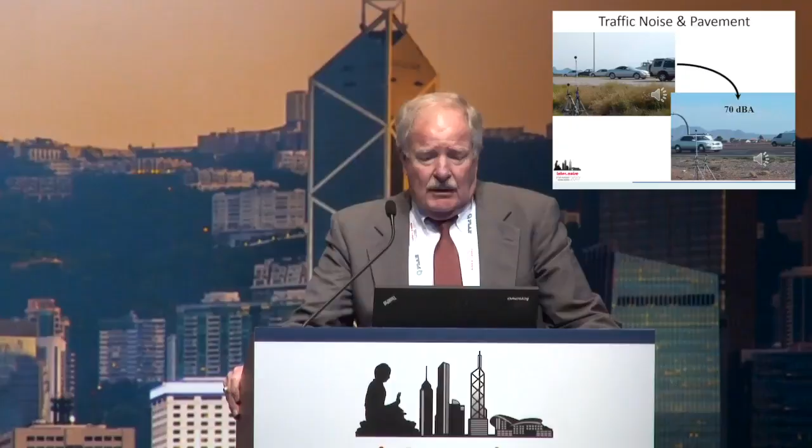Okay, a way to illustrate that is my first audio example here. The question is, which of these would you like to live next to?

You can tell the second one is quite a bit quieter than the first. It doesn't show up here on this slide, but it's about a 9 dB reduction. For those of you that don't deal with dB too much, 3 dB is usually called noticeable, and 5 dB is typically what's used for noise abatement criteria for being a significant reduction.

You might ask, why haven't regulations worked? Automobiles have been regulated for some time. Unfortunately, the test procedure is really geared at powertrain noise. The test itself is low speed under full throttle acceleration, so it tends to be dominated by engine noise. Also, the test surface used is a relatively quiet pavement, so it tends not to emphasize tire noise.

There are new procedures being developed, though, or starting to be in practice now, that will address tire noise more, and also there's efforts at tire noise labeling and that sort of thing. So eventually all these things will help, but the biggest problem is that there is a wide range of level that's produced by different pavements.

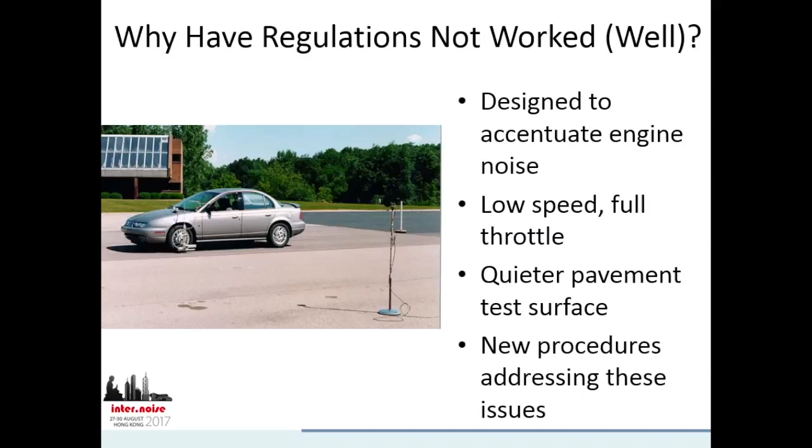This kind of illustrates the pass-by noise contributors. This is data taken by the Federal Highway Administration in the US. The green line shows non-accelerating or cruising vehicles, averaged over many roads—these are thousands of vehicle pass-bys. The blue line shows vehicles under acceleration. Now, the pass-by procedures that regulate vehicle noise tend to deal in the area of around 50 kilometers per hour, so it's kind of bringing the blue line closer to the green line as tire noise or engine noise becomes lower with these regulations.

The brown line is basically a typical fit for tire noise, which in this case is about 40 log of the velocity. So what you can see when you compare the green and brown lines is that under cruise conditions, it doesn't take very long until the pass-by noise level is dominated by tires as opposed to engine noise.

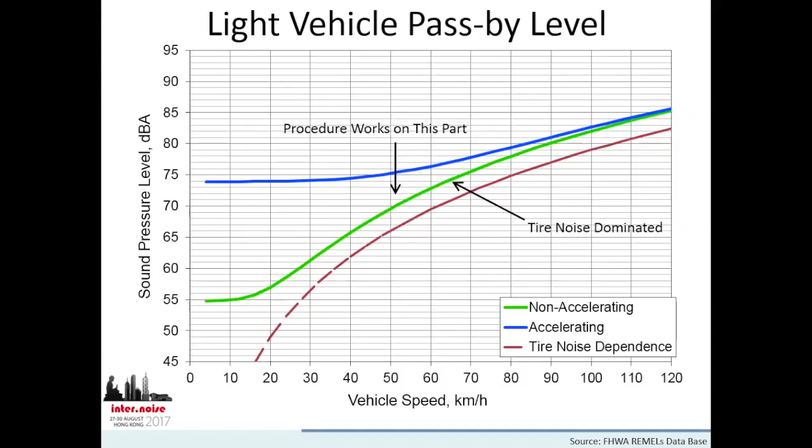The same thing is true for trucks. This is an example of some beamforming we did recently, geared towards looking at noise sources on heavy-duty trucks. This is an A-weighted contour, so yellow is the higher levels. What you find in terms of this A-weighted level contour is that, in this case, the drive axle tires are one of the dominant sources, with possibly some engine noise to the front of the truck.

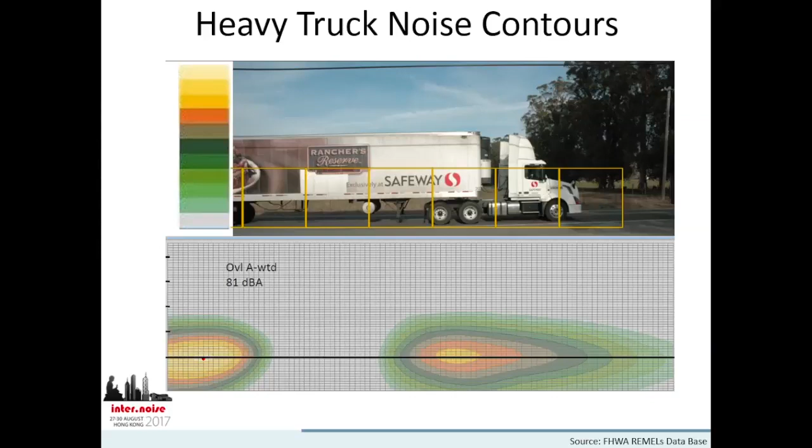And also, interestingly enough, the trailer tires at the back are equally loud to those in the front. So this just emphasizes how much of a role tire noise plays in truck noise also.

This is going to be an outline of what my presentation will be today. I want to go through the phases of quieter pavement implementation. This is semi-universal, I think, in listening to presentations and talking to people in other parts of the world, in terms of the steps you go through. The first step is really awareness, and for a lot of people that's already happened—they know there are quieter pavements and that it can affect traffic noise.

One of the big contributors to this awareness was the book I'm showing here by Ulf Sandberg and Jerzy Ejsmont. This book was published, I believe, in 2002, and I've seen it now in almost every Department of Transportation pavement engineer's library or on their desk someplace. So it very much had a big impact on the field, I think. And I should say there's almost everything you ever wanted to know about tire noise in this book, except maybe the answer to what causes tire noise.

And that's only because there are so many different mechanisms, and it's a very complicated topic. It varies with pavement, varies with tire design, on and on.

The next part of implementation is actually coming up with measurement methods. To start looking at using quieter pavements, you need to know how to measure it. So that's the first step.

The next step typically is surveys. Once you have a measurement method that's proven and standardized, you go out and measure a lot of different roads to find out what the pavement's different noise levels are. This can be done in different places, but typically agencies will do it in their local area because those are pavements they know they can build if they find a quieter one. They'll also do more academic surveys to look at what's been done in the literature and report it elsewhere.

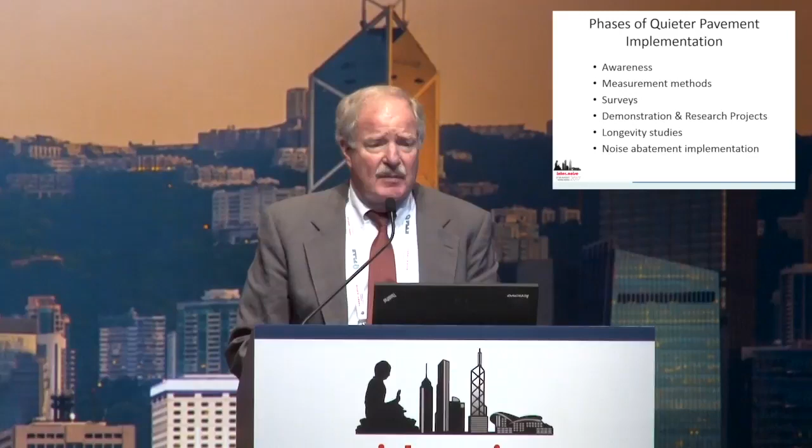After the surveys, they pick quieter pavements and usually end up doing demonstration projects or research projects to see how much noise reduction they can actually get by using a quieter pavement. After that comes the more tedious part, longevity studies. How long does a quieter pavement stay quiet? That's a really big issue. And finally, once you've addressed all these things, you come up with an implementation strategy—how to take these elements and combine them into a systematic way of looking at noise abatement.

So what's the big deal? It's easy to go out and measure highway noise, just as shown here. Put a microphone up alongside the roadway, let vehicles go by, measure what the noise level is, change the pavement, and do it again. Sounds real simple, but the problem is that the vehicle speeds may change, the traffic mix may change—there's a lot of variables involved.

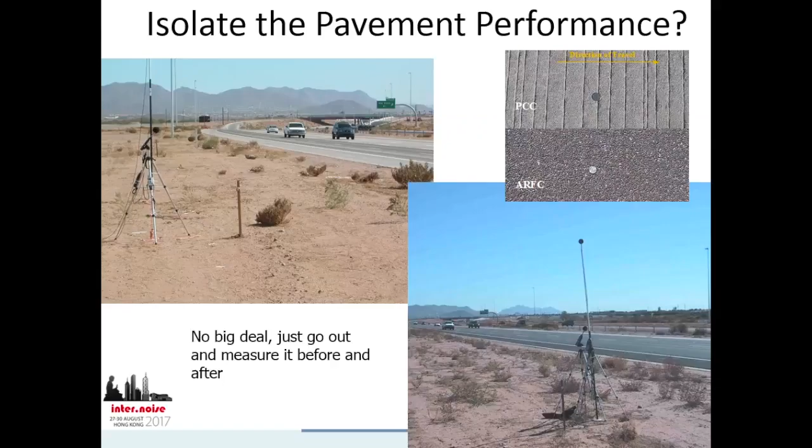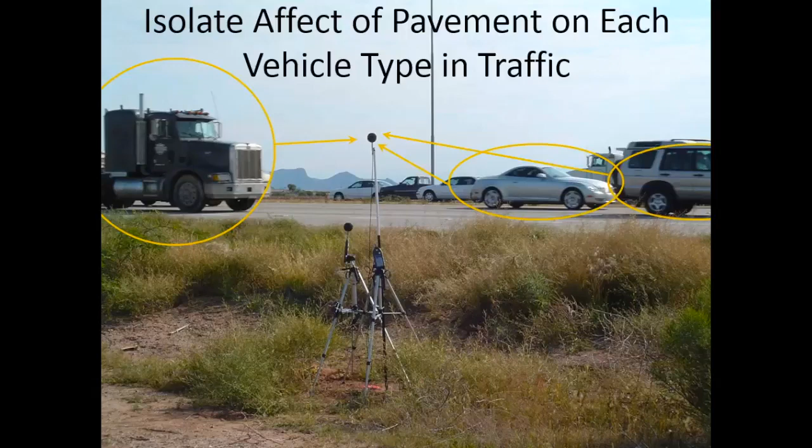So actually, to assess the role of the pavement, you need to do a couple things. You need to isolate the tire noise in particular, and we do that first by looking at individual vehicles. This is done by looking at averages of different vehicle classes, measuring pass-by noise, typically at 7.5 meters away from the vehicle. In that case, we can know how much noise a truck would make, how much noise a car would make on average.

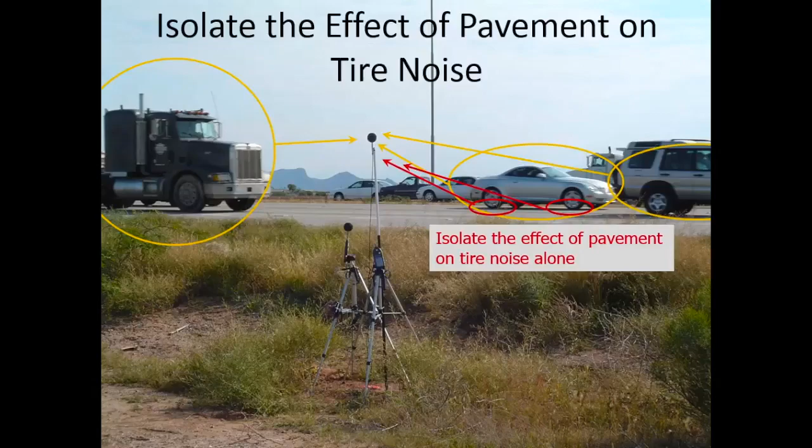The next step then is to isolate the tire noise. These vehicles, as I showed you with the truck, have noise sources other than just tire noise. You need to know how much contribution is tire noise versus other sources on the vehicle, and then relate that to the pavement. So there are procedures to do that.

I'll look at this as what I call a roll-down of measurement methods. You start with traffic noise, isolate individual vehicles and look at those statistically for noise, and then ultimately look at the pavement by measuring tire noise at the source. There are standards that help us along the way. Pass-by standards in the U.S. are under an AASHTO procedure, and there's also an ISO statistical pass-by method.

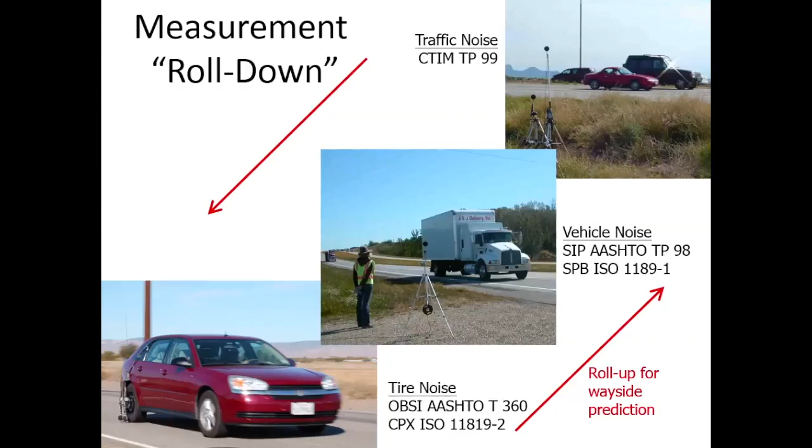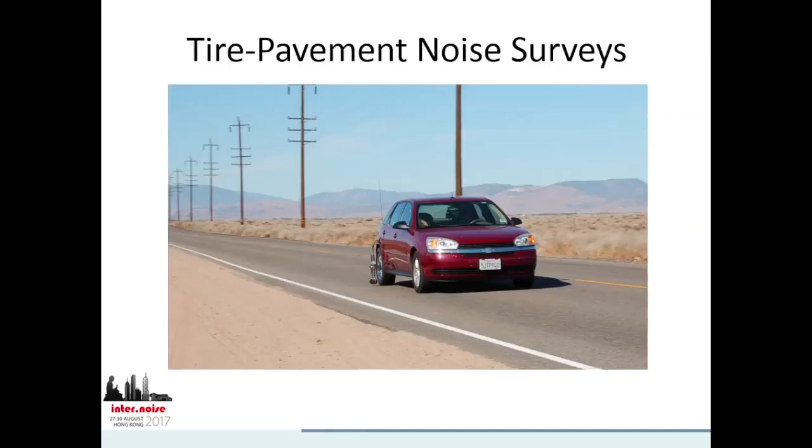Now that we have some measurement methods, the next thing to do is hit the road and start making measurements everywhere you can find a pavement you're interested in testing. This was done initially in the west of the U.S., in California and Arizona particularly, but it's not unique—other state agencies in the U.S. have done this, as well as other road ministries across the world.

In this particular database, we see a range in noise levels. The darker blue bars are generally the quieter pavements—these are open graded and rubberized pavements in this part of the country. The lighter bars are PCC, or concrete, what we normally think of as concrete pavement, and the gray bars are what's called dense graded asphalt. This database is a little bit limited in terms of pavement type just because of what's in that region.

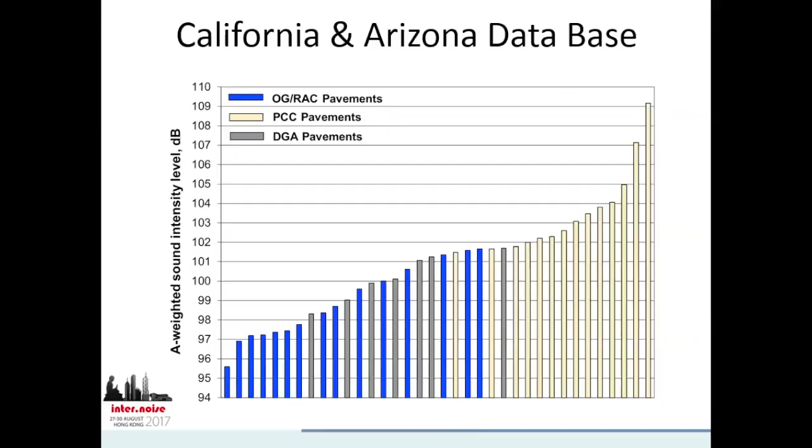For that reason, the next step was to actually take our test procedure, the OBSI procedure, to Europe. Back in the fall of 2004, there was a lot of interest in the U.S. to examine some of the quieter pavements in Europe. So we did that—we measured in four different countries, a good number of pavements of different types, and completed that.

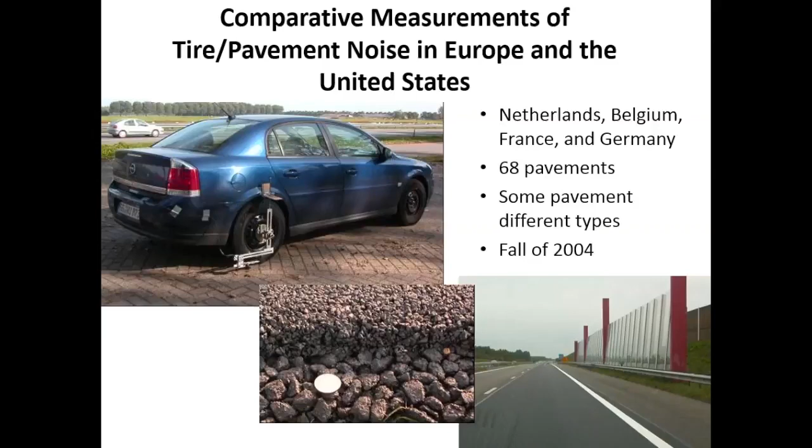What we found is shown here. The lower right shows similar kind of results from the European database compared to what I showed you before for California and Arizona. The thing to note here is that the range from quietest to noisiest pavement is about the same, about 13 dB. Now, some of these pavements aren't common between the states the database was from and those from the European countries, so there are more of those in the Europe area.

One thing in Europe at that time, they weren't using rubberized pavement, so we weren't able to test any of those. But in the California database, there was no stone matrix asphalt, which is common in other parts of the U.S. and certainly Europe and other parts of the world, but not in the West.

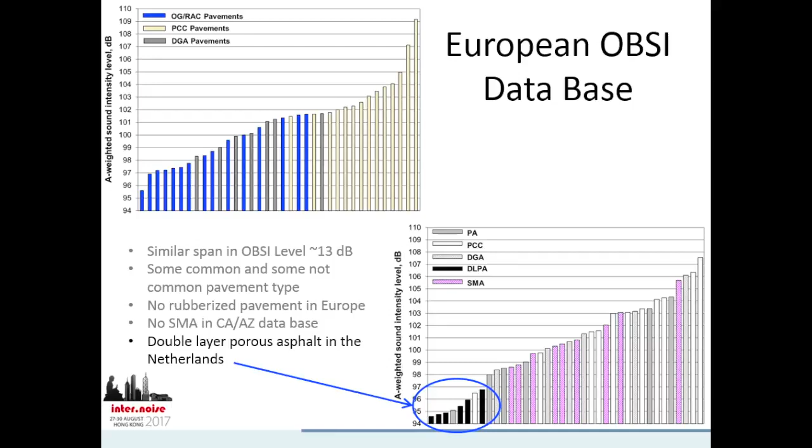The other thing you'll notice is that there are some really quiet pavements here. I flagged those because these are double layer porous pavements, and we'll be talking about those as we go on. But these were definitely world-class in terms of quietness. There are other pavements now being developed - I'm not quite sure I'd call them pavements, but essentially rubber-based, where the whole pavement is a rubber-based product.

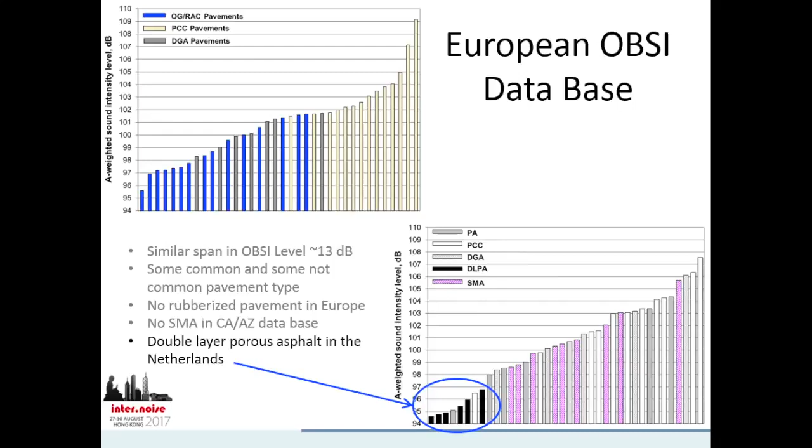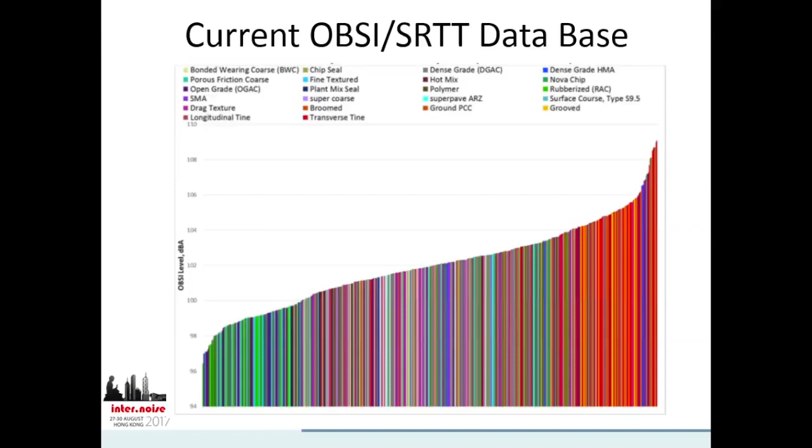So this is our current database, and this is pretty much limited to the West Coast again. It's just a pretty plot, so I thought I'd put it up there. But it shows all the colors that we've used, and pavements that we've measured.

Also, this is a good point of reference to understand what we talk about when we talk about quieter pavements. It's all relative - it really depends on where you start. So if you start with a very noisy concrete pavement, as I'll show you later, and then overlay that with a quiet asphalt, you'll get a big reduction, as this data would indicate.

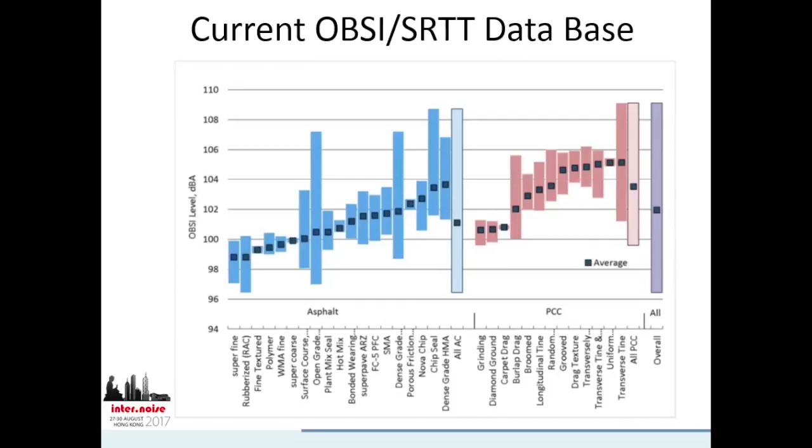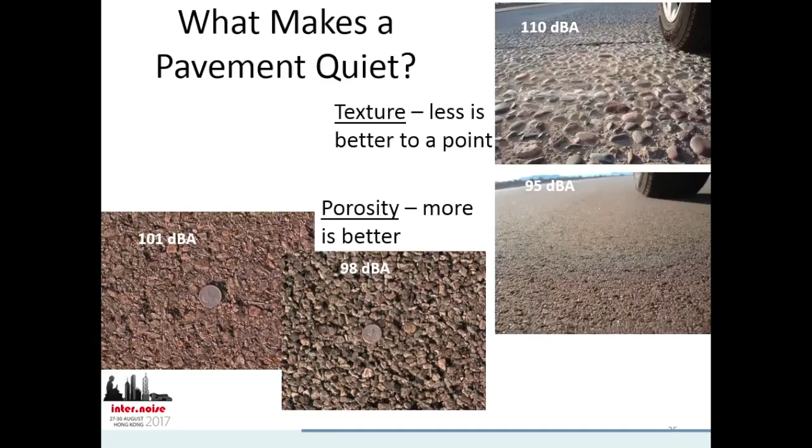As far as the other aspect of pavement that makes it quieter, that's porosity. What's shown in the lower left there are two pavements that are essentially the same mix of sizes of stone or aggregate in the pavement, and even though they are the same in terms of those properties, the porous pavement on the right of those two is about 2 dB or 3 dB quieter than the non-porous.

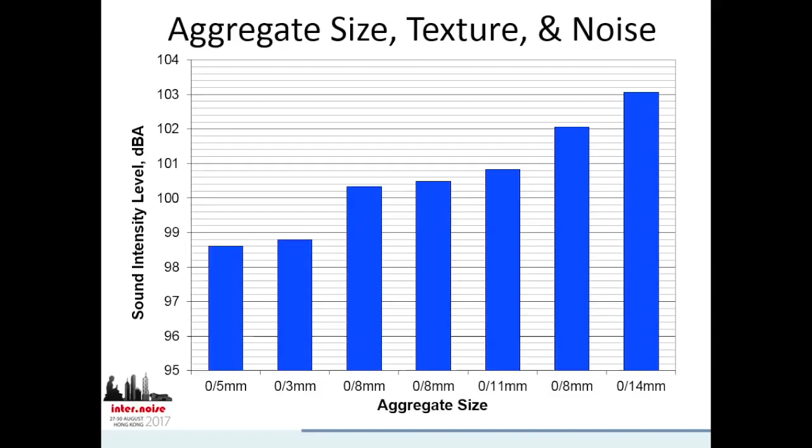So one metric of this is looking at aggregate size. As this plot shows, generally as the aggregates get larger, the noise goes up. And some of the quietest pavements are ones where we have very fine aggregate, which is shown by the aggregate size on the bottom of the chart there. But that's the simplistic view.

It's more than just texture - it's really what direction the texture is going. Is it plus or minus? Plus means that the aggregate is sticking up from the pavement, so when the tire goes over it, this provides an input to the tire, a vertical input, which ultimately gets radiated as noise. The other extreme is negative texture, where essentially the top surface is relatively flat, but the texture goes into the pavement - in other words, there's voids in the pavement, negative from where the average surface is.

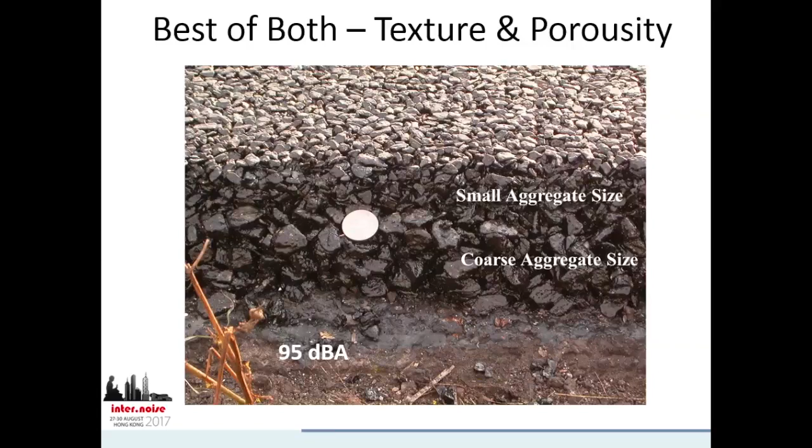And the noise levels are low. It is a much more complex design and has costs associated with it, but it does produce lower noise levels, quite a bit lower.

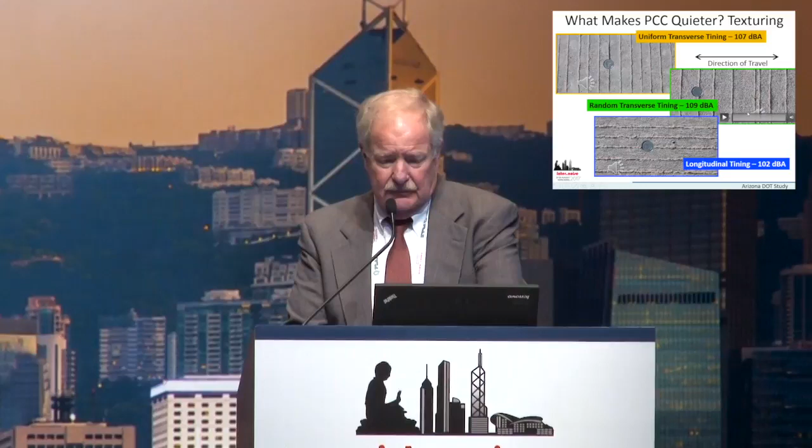Even within that, there are a couple of differences. This one is called uniform transverse tining. This is a random transverse tining. I think you can tell it's a little bit louder than the first one.

And then finally a longitudinal tining, where the grooves go in the direction of travel. That is definitely a quieter pavement. This is getting to be a very common surface treatment now for concrete, because it's relatively inexpensive—there's no added cost to doing the tining, and it is quieter.

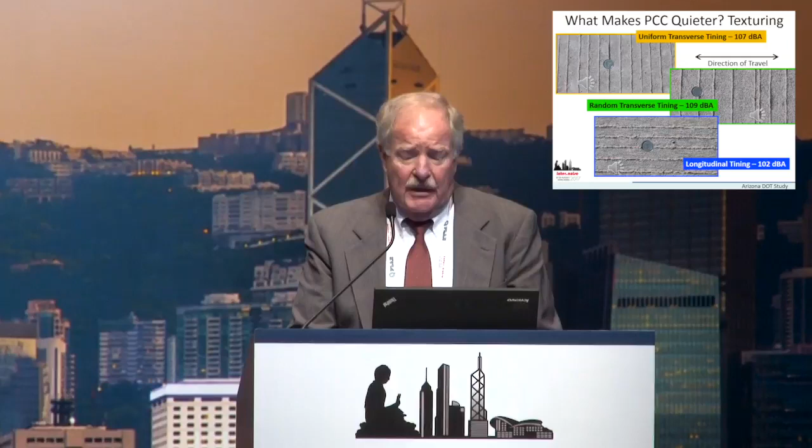These can be grouped. There was a study reported some time ago looking at another survey, going out and measuring pavements in a lot of different places to look at what these texturing effects do. The transverse is certainly the highest grouping, and what's called diamond grinding—I'll have an example of that shortly—is the quietest. That gets down to what you'd really call a quieter pavement for concrete.

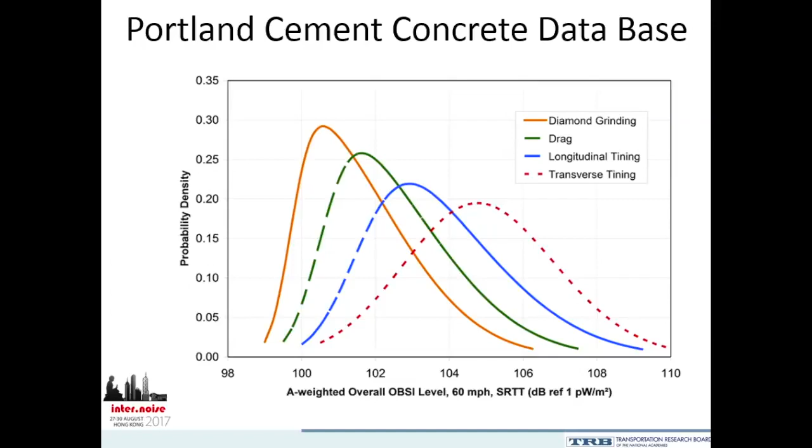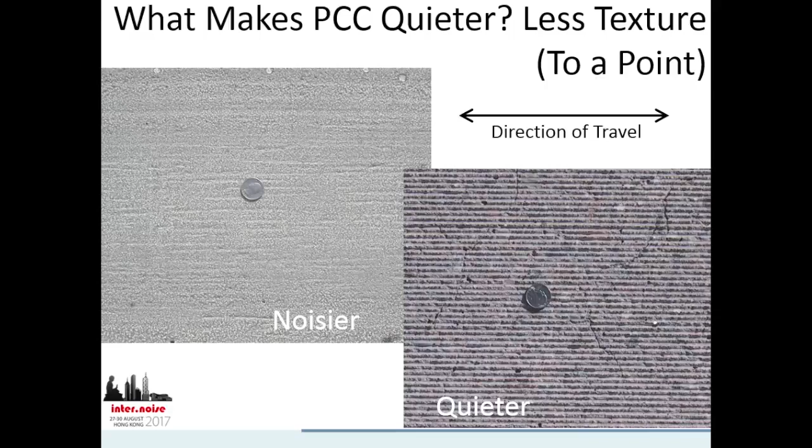The lower right, though, appears to have more texture to it. This is what's called a diamond ground pavement. This is actually an operation done after the concrete sets, so there is cost associated with it. But even though it looks like it has more texture, it's actually slightly quieter than the very smooth pavement. So, like I say, it's texture up to a point.

The other thing with concrete pavements that can be an issue is the joints. Most of the concrete surfaces have periodic joints in the pavement. Sometimes these are reinforced with rods so they're kept from being offset from each other. But over time, they tend to deteriorate and you get some offset between them. There are also grooves, and these can generate noise through pumping of air out of the groove.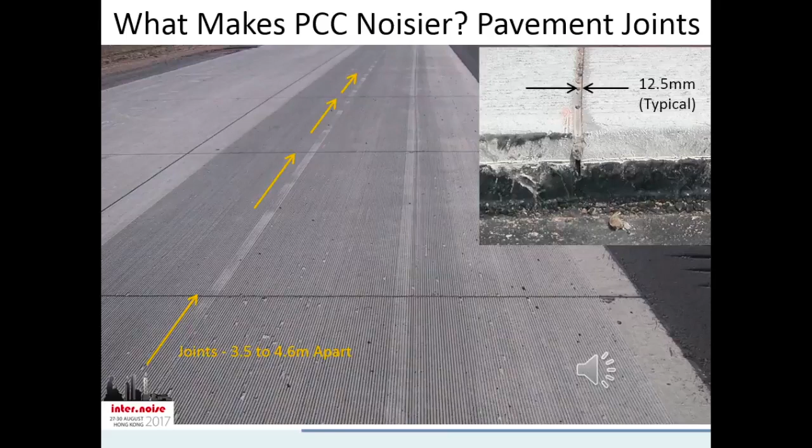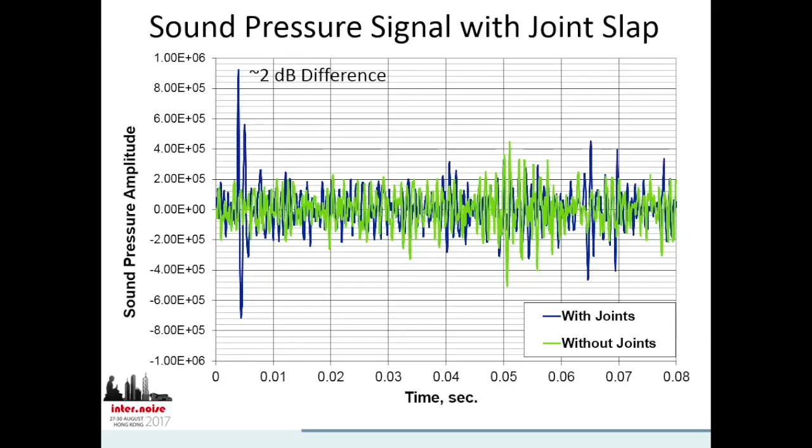So, this is what it sounds like. This is actually riding with the tire, the onboard sound intensity. But that's also the sort of thing you hear inside your car as you go over concrete with faulted joints, so this does increase the noise level. This is a time history of what I just played for you, both with and without joints—there can be about a 2 dB difference when the joints are added, as shown here. Because it's an impact sound, it's definitely a lot more noticeable than when they're not there.

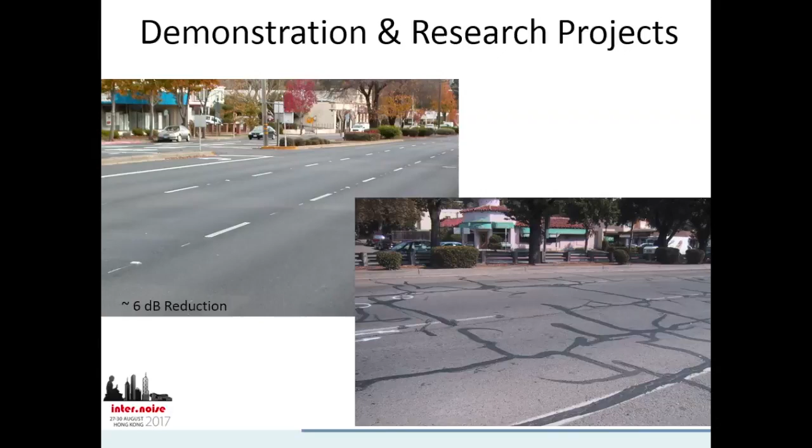This is pretty interesting because it was a relatively low speed pavement, somewhere probably around 50 kilometers per hour.

Now again, with the overlay.

There should be two things obvious about these pavements: not only is the level lower, but there's also a very definite frequency shift out of the high frequencies into the low frequencies. And generally, that seems to be more pleasing to people who live alongside a highway, to have the lower frequency.

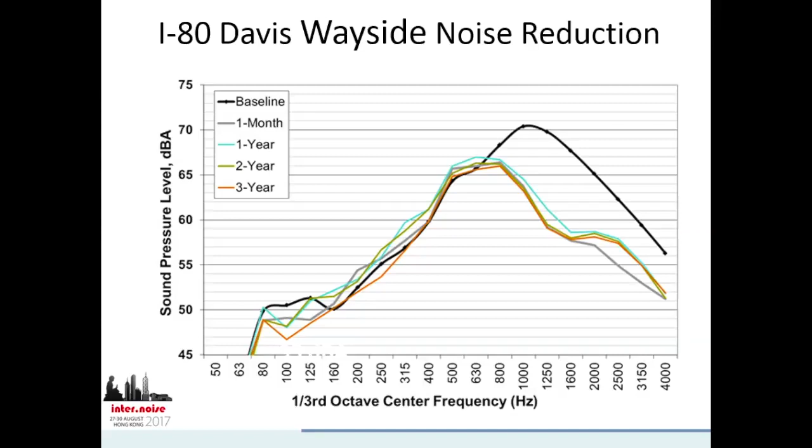The reduction shown here, the baseline was the old asphalt compared to the newer open grade. Overall, the level was about 6 dB quieter, but you can also see that frequency dependence. Essentially, the level at 800 hertz and above is remarkably reduced, in some areas almost 10 dB. This makes the effect of the overlay much more dramatic as you listen to it than just the overall level alone.

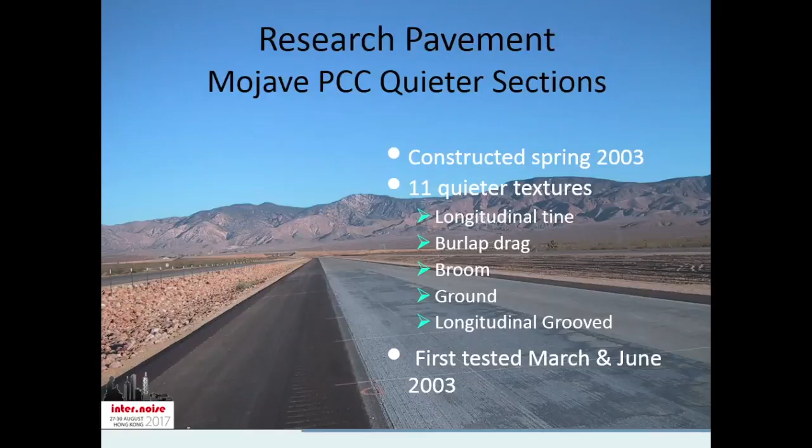There was also research work done in California looking at quieter versions of concrete, like some examples I showed earlier. This involved 11 different test sections built on essentially a new highway out in the middle of the desert, as you can tell. It was first tested in 2003.

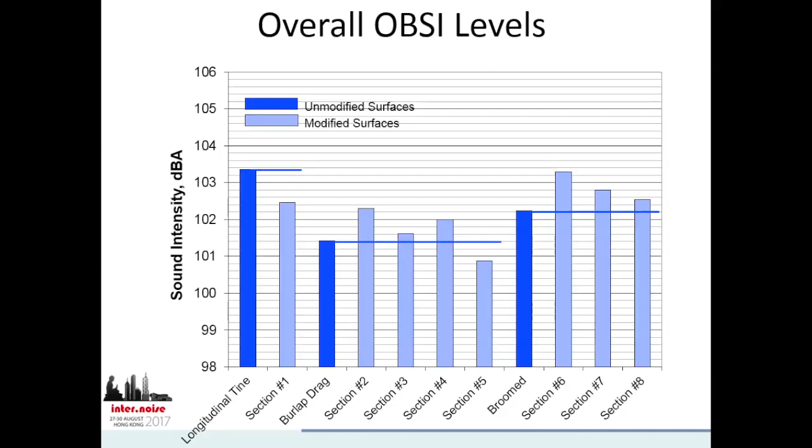This just shows some of the levels. All I'm showing here is that these are quieter surfaces, and that one ground surface I showed you is called Section 5 here, and it was the quietest of all these quieter PCC pavements.

With that information, the agency, Caltrans in this case, started using it in practical applications. There was a bridge deck up north of Sacramento where people were complaining about the noise. They had redone this bridge deck, and the residences to the side were up in arms about the noise level created from that.

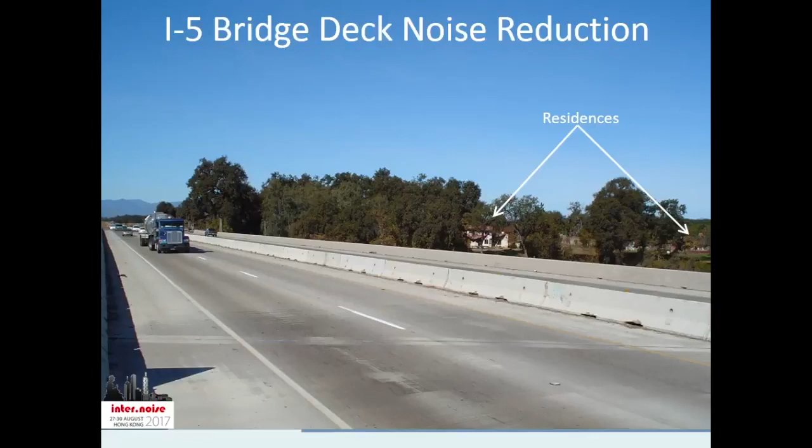This seemed like a good application to find out what we could do with some of the techniques and texturing we learned with concrete. I'm going to let you hear what this sounded like originally. You're going to hear it transitioning onto a bridge: first there's asphalt, then the bridge deck, then asphalt at the end. This was the original bridge deck.

I expect none of us would really like to live close to that, or even drive your car over it, for that matter. And then afterwards, same thing, it starts with the asphalt.

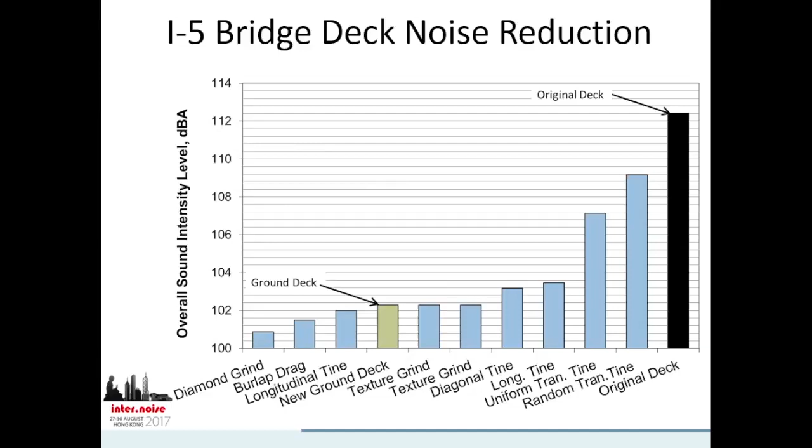There still was a little bit of residual that you could hear in terms of the transverse texturing. You can see here where the little loudspeaker is that there's still some of that left, but it was remarkably quieter—in fact, about 10 dB quieter. This really saved Caltrans in terms of these neighbors, and it was definitely well received.

Another demonstration project was done in Northern California, on a major freeway that goes north of San Francisco. In this case, it was an older pavement getting quite noisy, and residents along the freeway were clamoring for a sound wall to be built. Of course, that's an expensive proposition, and it's not usually done for an existing highway—it's usually done for new highways. So there was definitely resistance from the agency's point of view to doing that.

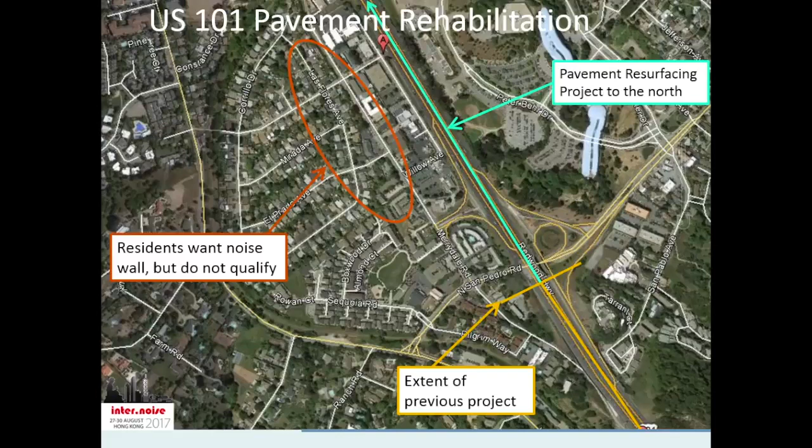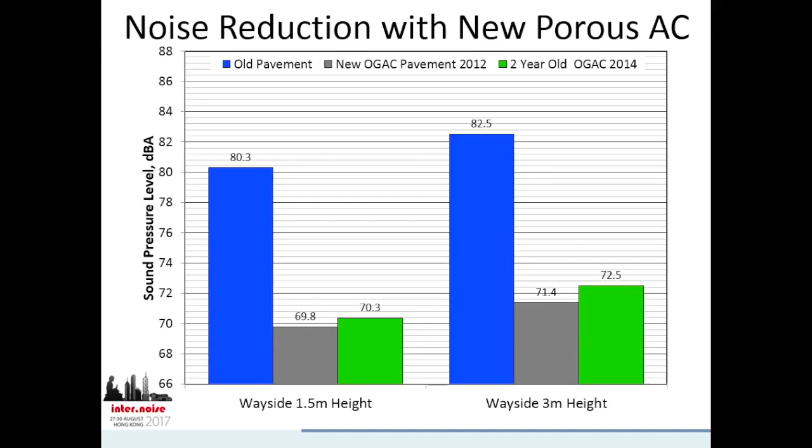So the overlay was applied, and the results are shown here. These are measured at 15 meters away from traffic on the new and old pavement. What you see here are two different microphone heights, on the left and the right. It was pretty much more than a 10 dB reduction in the wayside noise level. I don't have a clip for that, but I think you can imagine what that sounds like based on the other ones—again, a very dramatic reduction.

Probably the biggest poster child, if you will, for quiet pavement was something done in Arizona, by the Arizona Department of Transportation, ADOT as we call it. They did a pilot program for quiet pavement that started back around 2003, using preliminary research to look at which pavements were quieter. The project itself consisted of overlaying 185 kilometers of highway in the greater Phoenix area, coupled with initial and then long-term monitoring.

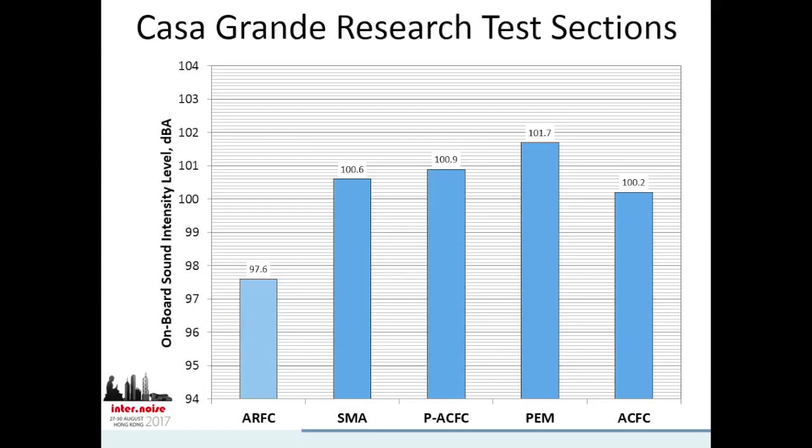The original research work that was done is shown here. This shows 5 different quieter pavements that were candidates for this overlay, some developed in Europe, some more local products. The rubberized asphalt friction course, ARFC, is shown on the left here. This was in use in Arizona prior to this, but it was found to be substantially quieter than the others, and it's actually the only one with rubber content in it. It's essentially ground up rubber put into the pavement, thought to make the pavement softer and reduce tire noise in that method. So this looks like a good option.

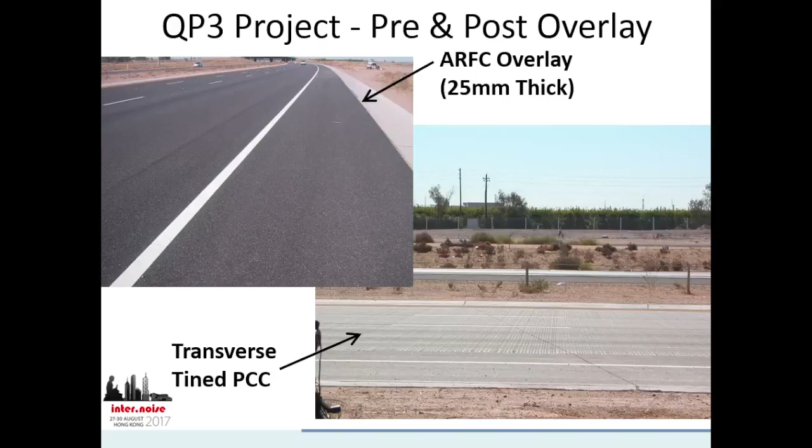This just shows the implementation of it. This is a highway after the overlay on the left, and the original transverse tined concrete on the right.

Here again, the reductions were pretty substantial. The pavement was pretty noisy that was there because it was all transverse tine PCC, but we're looking at somewhere typically 8 to 11 dB noise reduction from the overlay. I'm showing here the wayside, which is a darker blue, and also the onboard source levels. So in this case, the source level reduction pretty much carries over to the wayside.

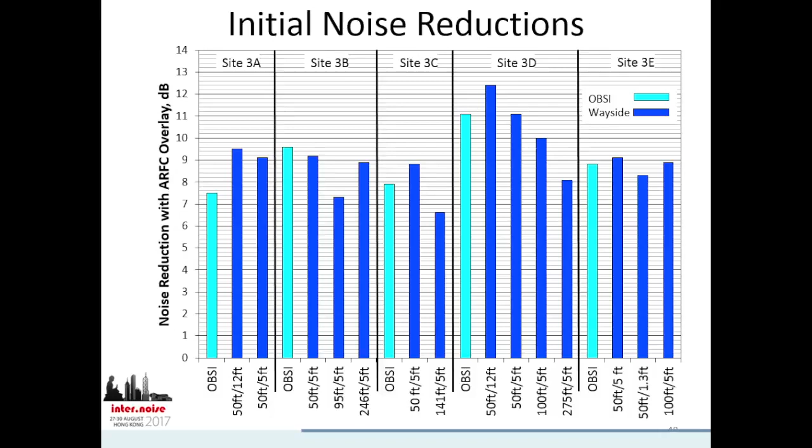Okay, so we know we can make things quieter with quieter pavement, but in terms of implementing it, the real issue is how long does it stay quiet? This shows some test sections that were measured in 2002 and then 2008 and then ongoing from there. But you might get an idea when you look at the pavements why the lower one's noisier by 2 dB.

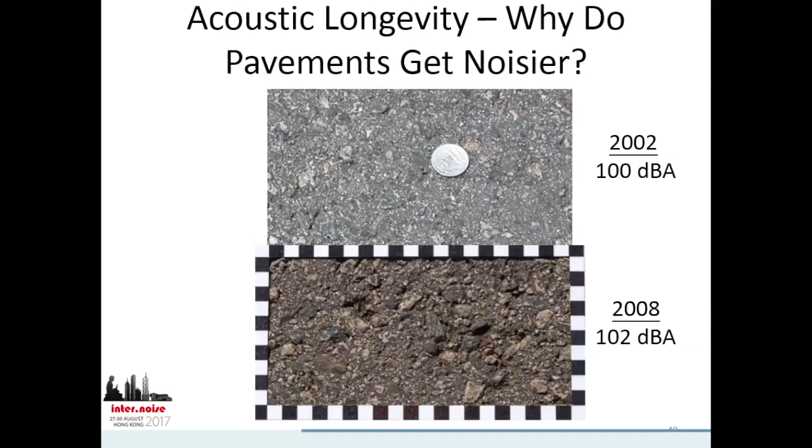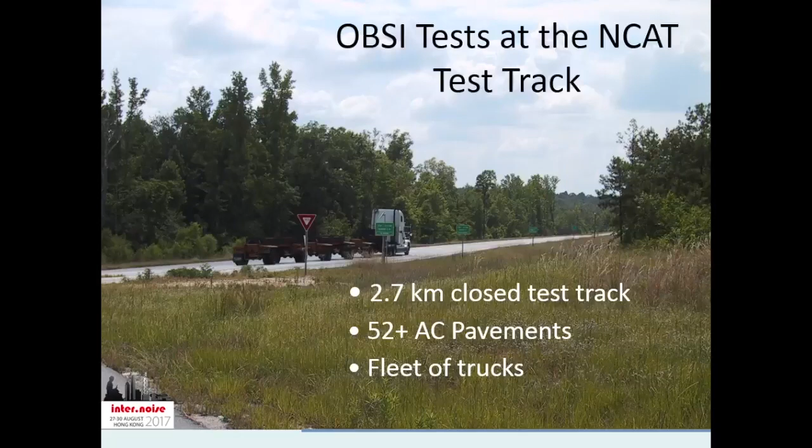To get a better understanding of that, we did testing at the NCAT test track, which is the National Center for Asphalt Technology. It's a pretty neat facility. They have heavy-duty trucks running 24 hours a day around this test track. It has over 50 asphalt surfaces, and they can measure all kinds of properties of it over the time they do this durability testing.

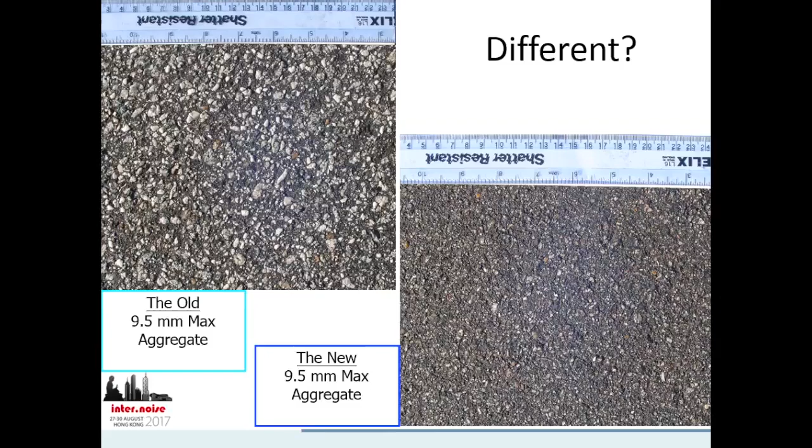One thing they have that's interesting is they have pavements that are identical but different ages. So what I'm showing here are two different pavements with the same design, basically 9.5 millimeter maximum aggregate size. You can see they're different from each other, so we quantify that a bit more. It's shown here with these different pavements. The dark blue are new pavements of the same design, and the darker orange ones are old pavements of the same design. I'm also showing you the porous pavements in there, similar to the porous pavements

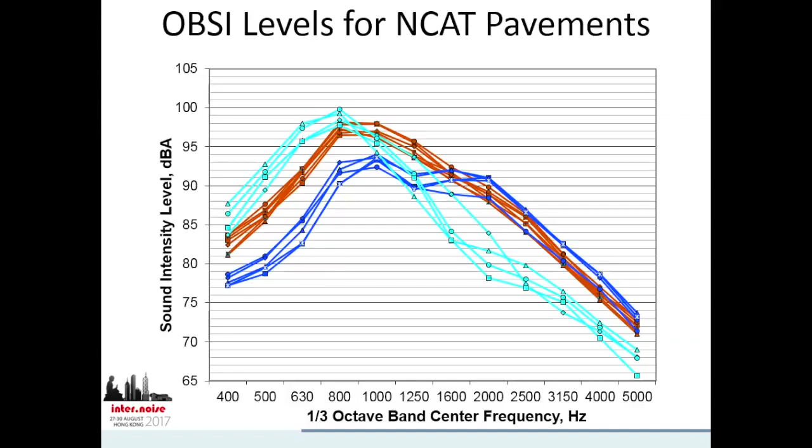that we measured in the I-80 Davis study I talked about before. If you go and average these, it comes into three groupings that I like to call the old, the new, and the porous. The new is interesting in that it does have accentuated high frequency noise, which depending on who you talk to, could be due either to frictional properties or to air pumping from the tread, in the sense that there's not much aggregate exposed, so it's a very smooth surface. It could tend to emphasize air pumping. Anyway, as the pavement gets older, the aggregate gets exposed and it starts generating lower frequency noise. So that's what we're seeing here.

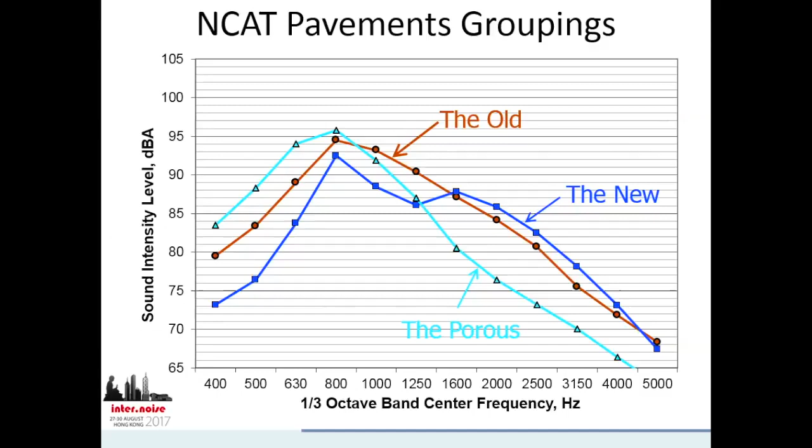For the porous, though, it's quite unique in that the levels are reduced, as we saw before, in the higher frequencies, starting at about 1,000 hertz. In the lower frequencies, it's a bit higher, and this is because typically what a lot of agencies will do to make a pavement porous is to increase the size of the aggregate so there's more spacing in between the different stones and essentially more penetration of air into the pavement.

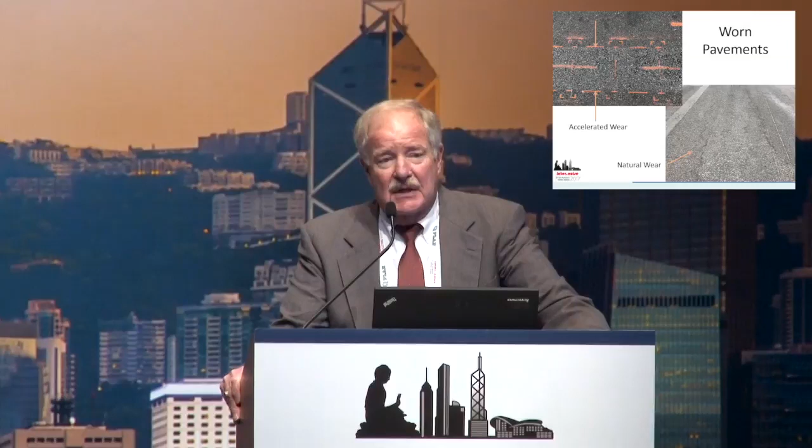This is some examples of worn pavements. The upper left is one that's actually produced by a machine. They essentially run a tire in the same track over and over again, loaded with this machine. What you can see is that in the path of the tread, between the arrows, the aggregate is much more exposed than outside of the path. This is one of the dominant things, particularly for asphalt, that causes increased noise level with time - this loss of aggregate, or what's typically called raveling of the pavement. This just introduces more positive texture that the tire sees.

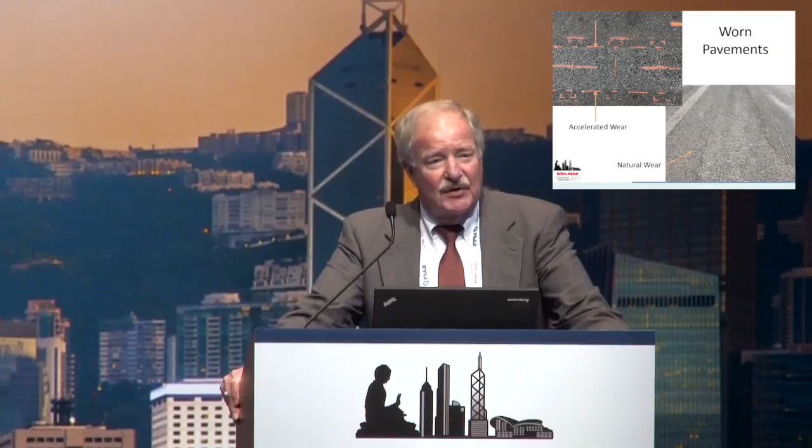Another example is shown in the lower right. This was just a naturally worn pavement in the subdivision where I used to live, and it's a very noisy pavement. It's also one of the things you can find in all these cases - a sure sign of pavement aging is when you see aggregate to the side of the road, where essentially these are just stones that got dislodged from the pavement and cast out to the side.

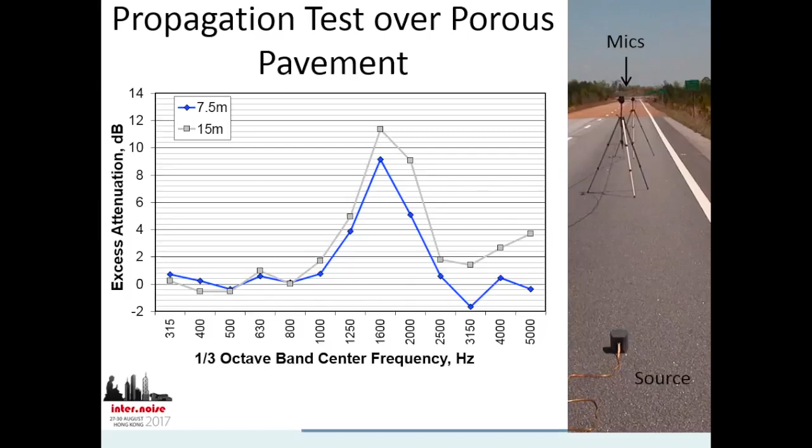So getting back to the porous pavement, these are measurements that try and replicate the propagation of sound over a porous pavement. We have a small loudspeaker source representing a tire on the ground, in the foreground of the picture on the right. What's shown is the difference in level between a non-porous pavement and a porous pavement. You see a large amount of attenuation when propagating over the porous pavement, particularly in the frequency range we've been talking about for porous pavements, so somewhere around 1,000 to 2,500 hertz.

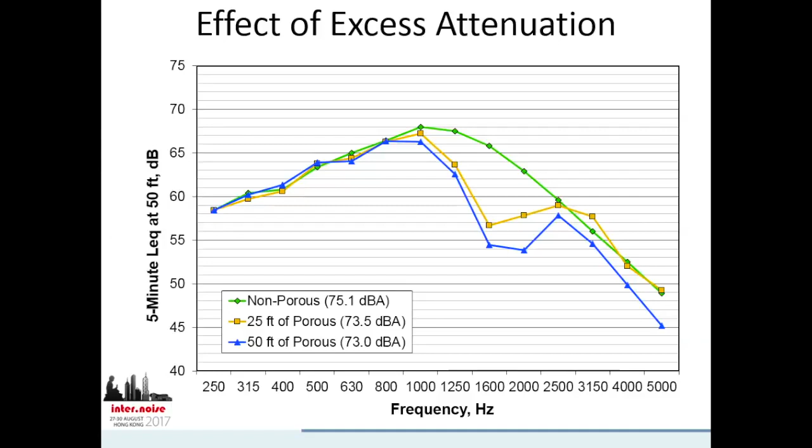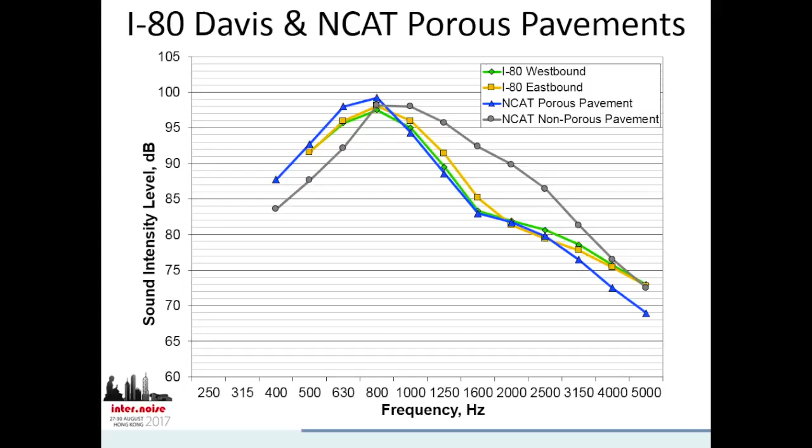This just goes back to the Davis and the porous asphalt, but we can see the gray line is a non-porous and the other colors are porous pavements, and we see this reduction in the higher frequencies.

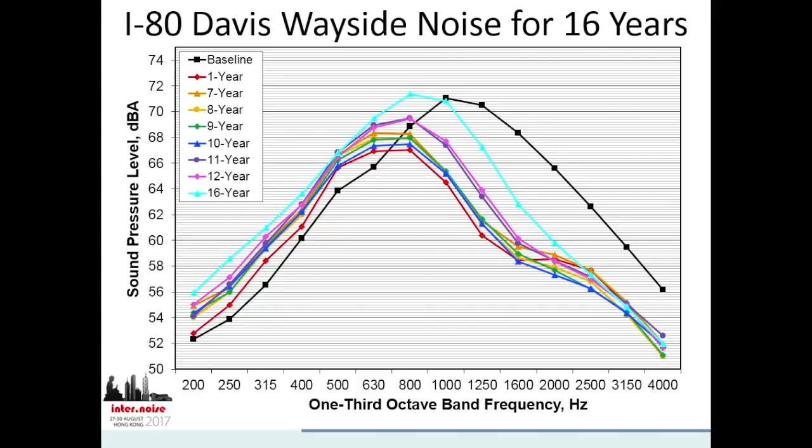At this point in time, the pavements are about the same in terms of overall noise level.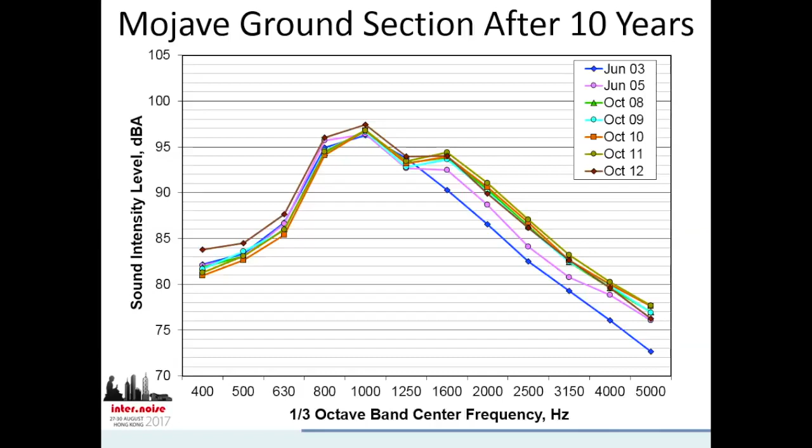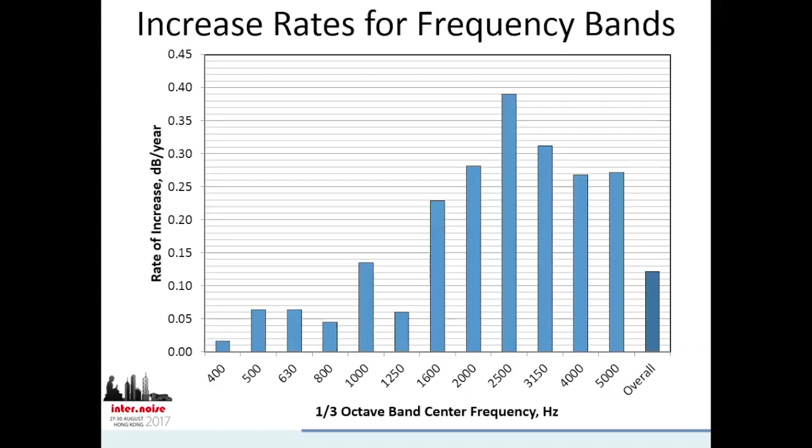If you look at those increases in each of the bands, this is taking the data for each band and fitting a linear regression through it - so it's level versus time. The plot is dB per year on the y-axis, and then the frequency band on the x-axis. What you see is this definite bias towards increasing the noise, or the rate of decline of the pavement, centered in the higher frequencies, particularly around 2,500 hertz.

So what's going on here?

The one thing you can see from looking at this pavement in more detail is initially the pavement had some texture to it. It had longitudinal grooving, and it also had more texture in the surface itself. After time, the surface polishes and loses friction. Very often there's concern about rehabilitating it because of that loss of friction. So that's one of the mechanisms going on with quieter concrete.

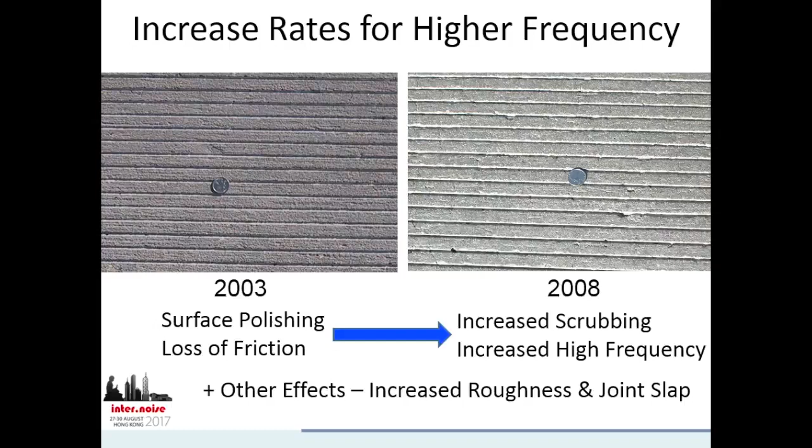There are other effects too, certainly increased roughness and joint slap we talked about before. One of the other things that can really tear up concrete is chains instead of snow tires. So these pavements can deteriorate very rapidly if there's a lot of use of chains instead of snow tires.

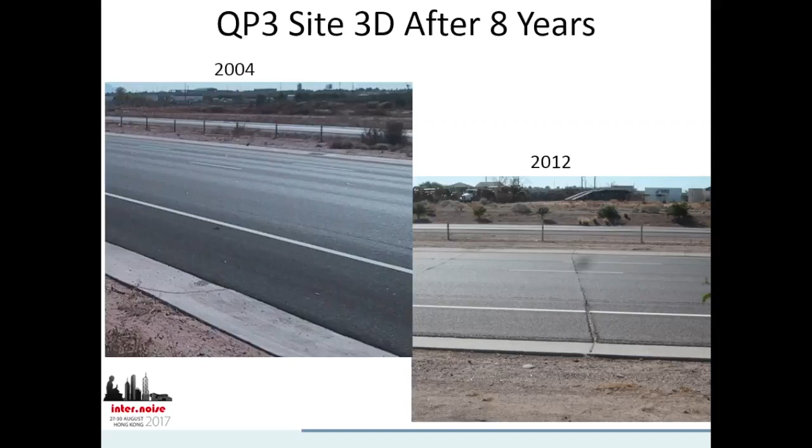In Arizona, this shows what happened after 8 years. You can see a couple things. If you look real closely in 2012, the aggregate is a bit more exposed, so it's a bit rougher surface than it was before. And also the joints are creeping up — the concrete joints are essentially propagating up from the surface, and we see now this slap, slap, slap again that we listened to with the concrete.

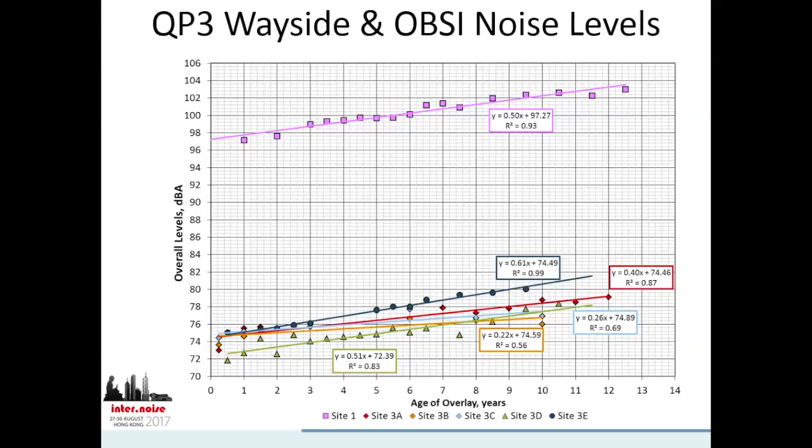Over time, this shows the onboard sound intensity level, and the upper curve and lower curve are 5 different sites where this was measured for wayside. Basically we're looking at about 0.4 dB per year, and the wayside deterioration a little more than that, about half a dB per year at the source itself.

So what this does — I don't expect you to read this, I'm just going to make a few points about it. This is kind of a compilation of the longevity data we had available from a number of different studies. A couple things to notice: we did track the AADT, the annual average daily traffic, basically on the pavement. And what we find, as has been talked about in other research, is that the pavement tends to deteriorate more rapidly with increased traffic, particularly with increased truck traffic.

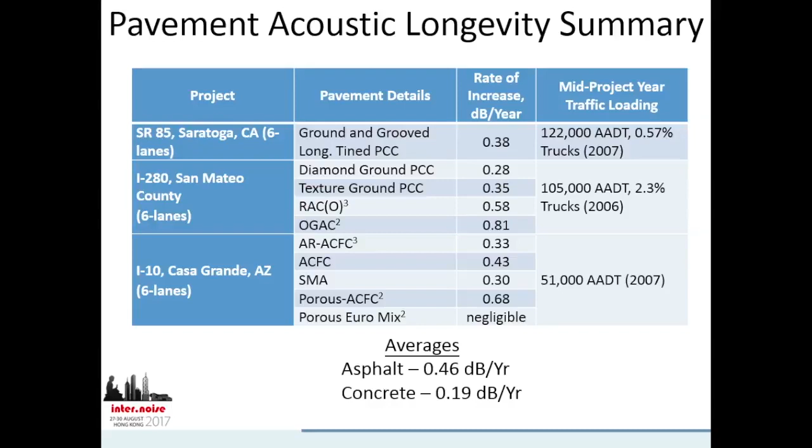So this is just more of that data. The thing I'll draw your attention to is the averages between asphalt and concrete. As you can see, the asphalt does tend to increase faster with time. So it can be quieter, but it also increases at a faster rate in terms of noise level.

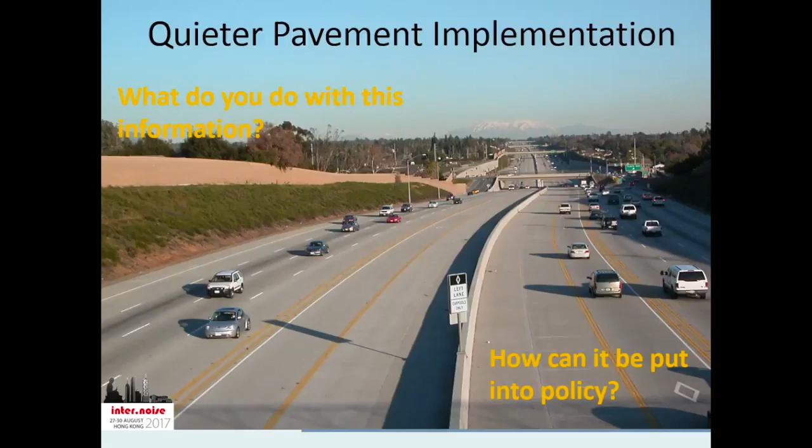So assuming you've grabbed all this information, now what do you do with it? How do you actually put it into policy that can be rational and affect the lives of people who live near freeways?

Basically there are two choices for abatement, or maybe combinations of choices. Sound walls are certainly, by the U.S. Federal Highway Administration, a preferred method because they provide a reduced or continuous amount of reduction. So if you put the sound wall up and it gives you a 10 dB reduction, it's going to give you that 10 dB reduction no matter what the pavement is on the other side. On the downside, the impact on neighbors to the freeway is limited to those relatively close to the barrier — it doesn't reduce noise levels throughout the whole community, just much more benefit for those close by.

Noise levels still increase with time. It doesn't matter whether it's 10 dB lower than before — if that source keeps going up, at some point you're going to be at a level you were trying to guard against at the beginning. So it helps, it's constant, but it doesn't keep things from increasing. And sound walls are also expensive to build, and there are limits on where you can build them. If it's a hilly area, with houses going up the side of a hill, the barrier won't do you any good because it won't block the line of sight.

Quieter pavements have a lower initial cost than barriers. You can generally put down a quiet pavement relatively economically, and you have to put down some kind of pavement to begin with anyway for a highway project, so that offsets any additional cost for something like a porous pavement. It also gives a larger area of reduction, extending out farther throughout the whole community, and it can be used anywhere — it doesn't matter if it's on a hillside or wherever.

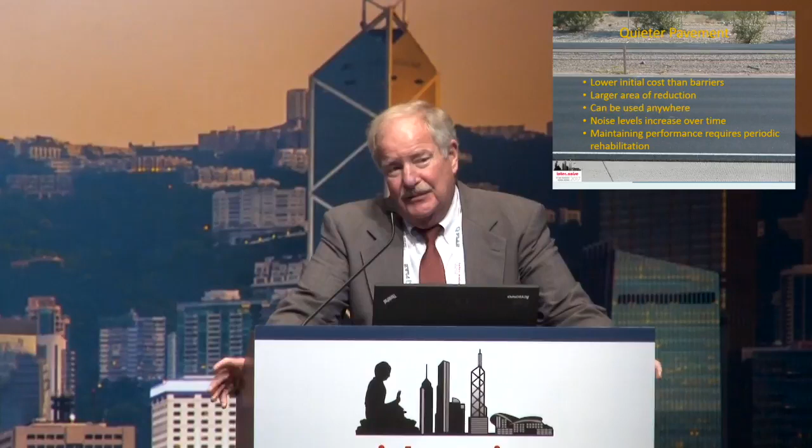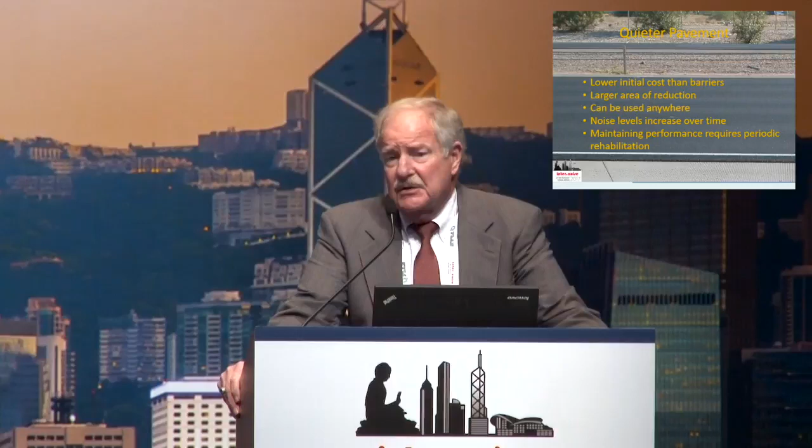The downside is the noise level will increase over time, which we talked about, and this requires periodic maintenance. In this case, the maintenance, as in Arizona here, would be repaving — essentially either grinding away that surface or adding another sacrificial, quieter surface on top of it. So there are those costs.

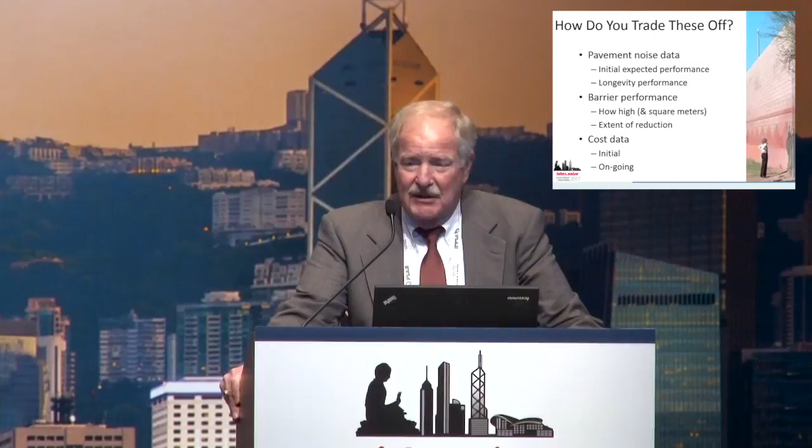So you have to trade these off, and you need the data. One is the pavement data we've been talking about, the initial reduction and then the longevity. For the barrier, you need to know how high you're going to build it and what the square meters are going to be. This is one of my colleagues standing next to a barrier in Phoenix, and this might be a little bit out of control in terms of the size of the barrier. Anyway, the other part you need is cost data: the initial cost, and then an estimate of the ongoing cost.

This requires some additional input. You need to establish your goals: how much noise do you want to reduce, and how many people do you want to impact by that reduction?

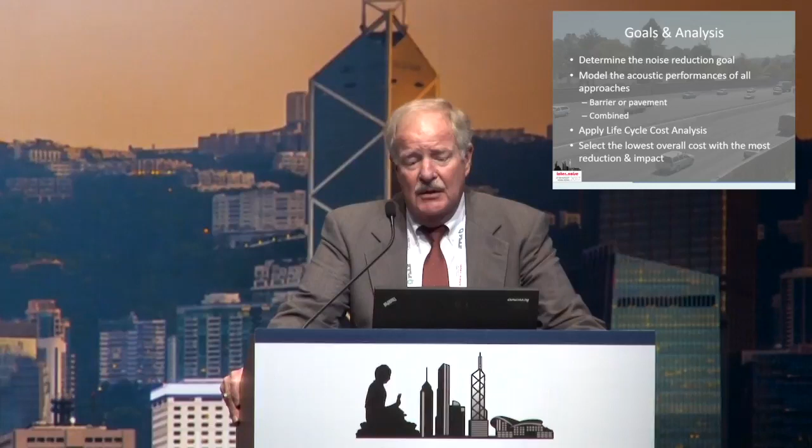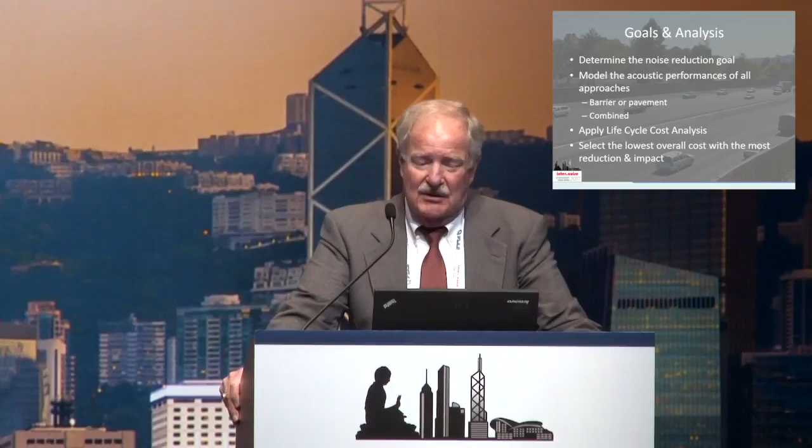You also need to be able to model that reduction, both in terms of the barrier and the pavement. So you need to incorporate pavement into your prediction model, as well as the effective longevity, so that you can predict what happens towards the end of the life cycle of the quieter pavement. There are tools to apply to analyzing this—life cycle cost analysis—where you look at the trade-off between the initial cost of the barrier compared to the ongoing cost of maintaining the quiet pavement. Pretty simply, you put all this together and figure out which gives you the most bang for the buck: the lowest overall cost with the most reduction and most impact on people living near the highway.

This is outlined in a study done some time ago—actually a workshop and an I-INCE symposium that was sponsored a few years back, looking at methods of doing this kind of cost-benefit analysis for barriers. It's also available on the web. I think there's a link to it on the INCE-USA website, if you're interested.

For more information, we've just completed putting together a quieter pavement manual for the state of California, and that's going to be on the Caltrans website soon, I understand. So that would be another source of some of this information I've been sharing with you.

So I don't really have any conclusions, other than that there are things you can do, and it takes a whole approach to actually do the implementation—looking at the data, the longevity, the initial reduction costs, and trading it off with these barriers. So with that, thank you for your attention.